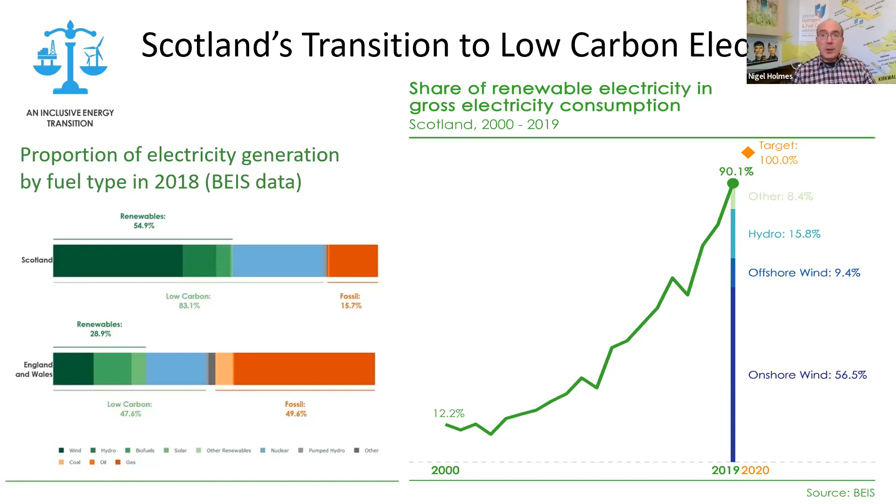But the challenge now is not electricity, it's actually to do with the decarbonisation of heat and transport. Electricity is about a quarter of Scotland's final energy demand. Transport is about the same amount, just over a quarter, and heat represents pretty much half of Scotland's energy demand. So if we're going to be successful in meeting the 75% reduction of greenhouse gas emissions by 2030, we will absolutely need to tackle the emissions from both transport and from heat.

And one of the big challenges here, of course, is that the current energy supply into both of those markets is essentially fossil fuels, liquid fossil fuels into transport, and natural gas is one of the main forms of energy used for heat. So how do we replace liquid fossil fuels and natural gas with low carbon equivalents?

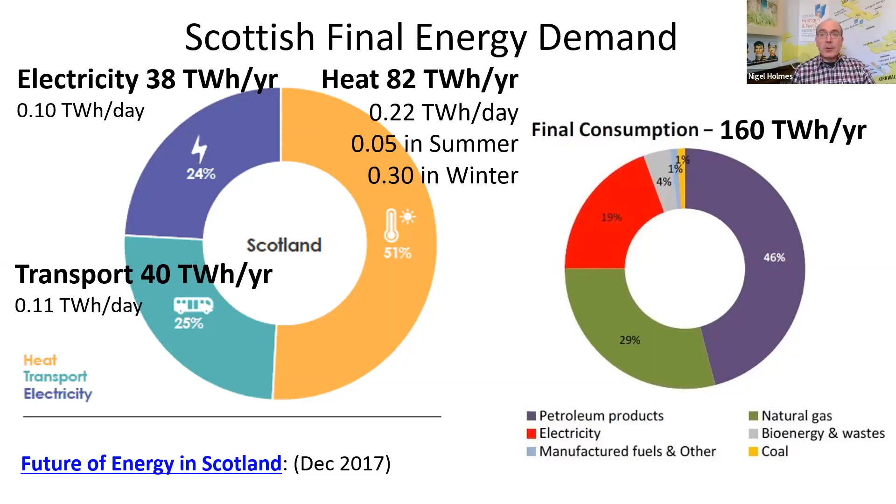As well as that challenge, when you just look at the annual pie charts, there is another factor which needs to be looked at very, very carefully, and that's around the seasonal variability of energy demand. The annual pie charts kind of just smooth things out. So you look at it, half of Scotland's energy demand comes from heat, but what that misses is that the scale of energy demand for heat varies throughout the year. Not surprisingly, we need more heating in winter than we do in summer.

Even this doesn't show the full detail of when you get very cold days, the amount of instant heat demand that happens typically at 6:30 on a very cold morning when everybody's central heating switches on. So there are real challenges in terms of how you meet the instantaneous demands and not just the annual averages. A lot of this will need to be considered by using energy storage, and this is well beyond what most battery systems would be capable of, even if they were commercially viable.

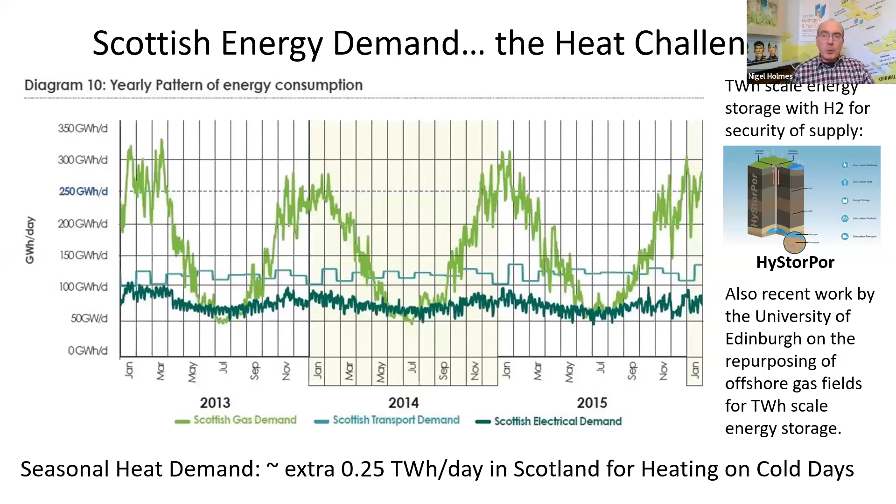So the examples I'm going to give are, we're going to be starting in Methil, in Fife, just north of Edinburgh, moving up to Aberdeen, and then heading on up to the very north of Scotland to Orkney before we come back down to Cromarty.

Just to mention, that dock was actually one of many docks in Methil that was used for exporting coal. So Methil was actually one of the biggest exporters of coal in the UK, and it's ironic that now it's one of the areas where a lot of the work on developing hydrogen systems has actually been carried out.

The Hydrogen Office, over the past 10 years, has provided a lot of education and outreach to schools and colleges in Fife. About 30,000 pupils and students have been through workshop activities led by the Hydrogen Office, and that's really important because it set the foundation for a good understanding, a good appreciation of hydrogen fuel cell technologies in the local area. But the Hydrogen Office has also been the base for various innovation projects.

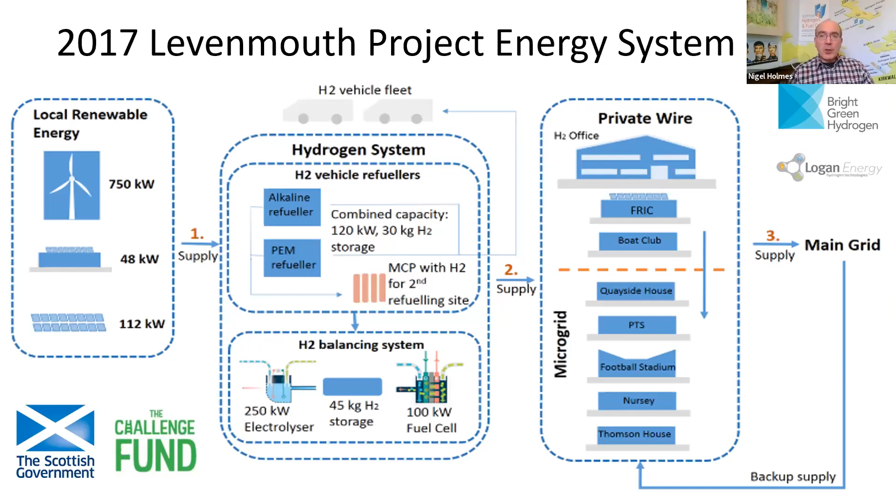And that was actually starting to predict not just how much you had in the storage, but what was the weather likely to be like over the next few days. So you could start to anticipate the energy demand and the energy supply. This was supported by the Scottish Government's Local Energy Challenge Fund.

So it's not the perfect solution - you still have some diesel, but it's actually a big step along the way. There are now developments with the same type of engines, but with a much higher level of hydrogen. So combustion and fuel cells will be 2 of the options that can be used going forward for vehicles, and also for other types of power generation.

But the next stage in the activities in Methil, this is a really important project, and it's being led by SGN, the gas distribution network company for Scotland. This is a project to prove the practicality of converting households from running on natural gas for heating to running on 100% green hydrogen for heat.

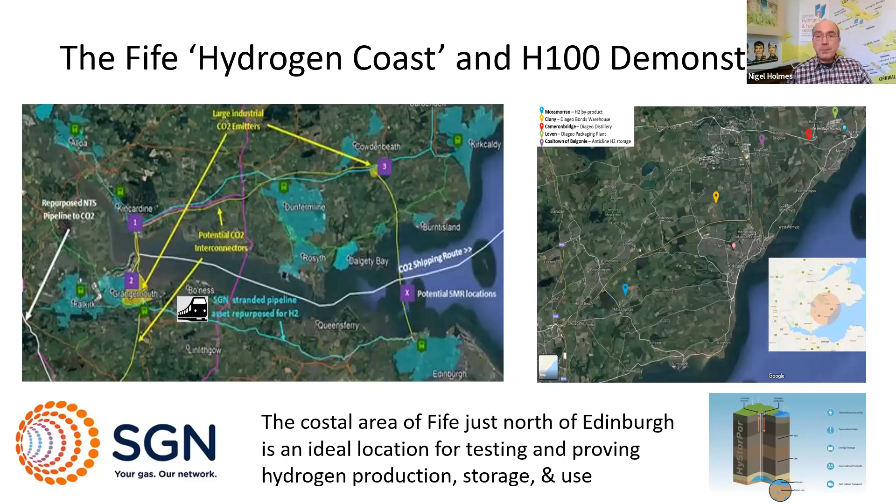Just up the coast from Fife at Bo'ness, another project is underway, nothing to do with heat - this is about transport. It's a project to convert electric trains into hydrogen fuel cell electric trains, with the plan for the train to be ready and running for COP26. So at Bo'ness, from the 1st to 12th of November, this train should be running using hydrogen.

We'll come back to the transport activities later on, but decarbonisation of heavy transport is one of the areas where hydrogen is seen as being particularly useful.

They've done over 1 million miles of travel, very reliable. One of the key successes has been the reliability of the hydrogen refueling, and that's helped Aberdeen develop plans for where it goes next in developing their hydrogen bus fleet.

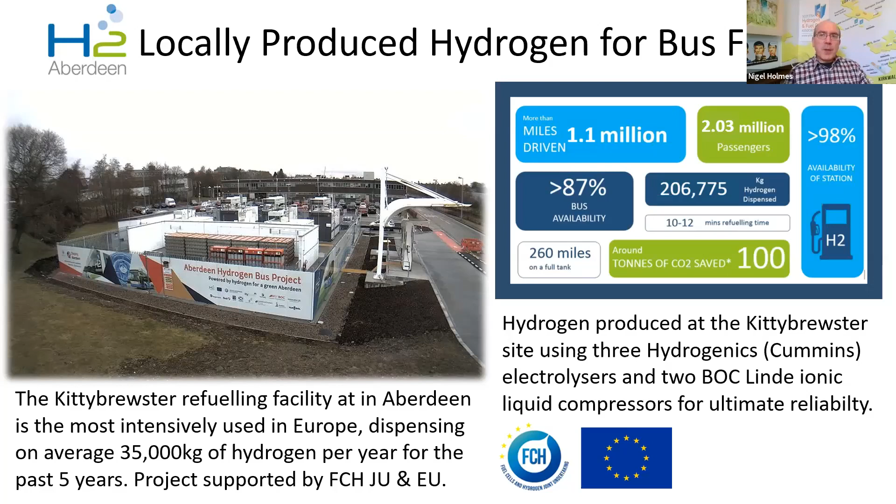But the design was very careful. There is built-in redundancy in most of the plants. There's actually 3 electrolyzers, 2 compressors, and I think just one refueling pump. But the work achieved its objective of reliability, and that set the foundation for where they're going next.

There are already 15 of the double-decker hydrogen fuel cell buses arrived in Aberdeen and starting to be deployed. And there's another 10 due to arrive. So there'll be 25 hydrogen fuel cell double-decker buses being used in Aberdeen by the middle of next year.

Now, the advantage of fuel cell technology is that, unlike combustion engines, there is absolutely no NOx or particulate matter from fuel cells. Fuel cells work in a very different way - it's a catalytic conversion of the energy in the fuel to make electricity rather than a high temperature combustion. In using fuel cells, you avoid the NOx formation and the particulates that you get from combustion.

But also in Aberdeen, there are a number of Toyota Mirai fuel cell cars. Some of these are used by the NHS, there's one used by SEPA, and some used by Grampian Police. But the one I'd like to point out is, if you've got a driving license, you can actually book this one up and take it out. It's a fantastic car to drive, a bit large for my liking, but very smooth, very comfortable, and a pleasure to drive.

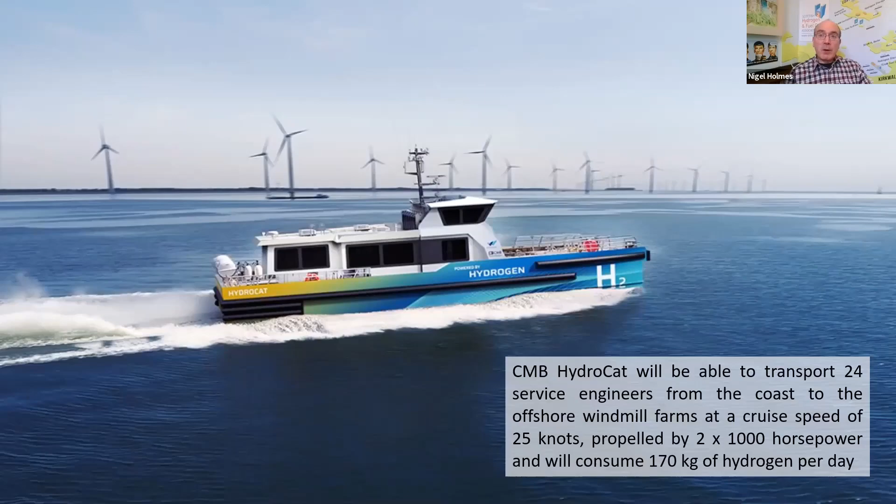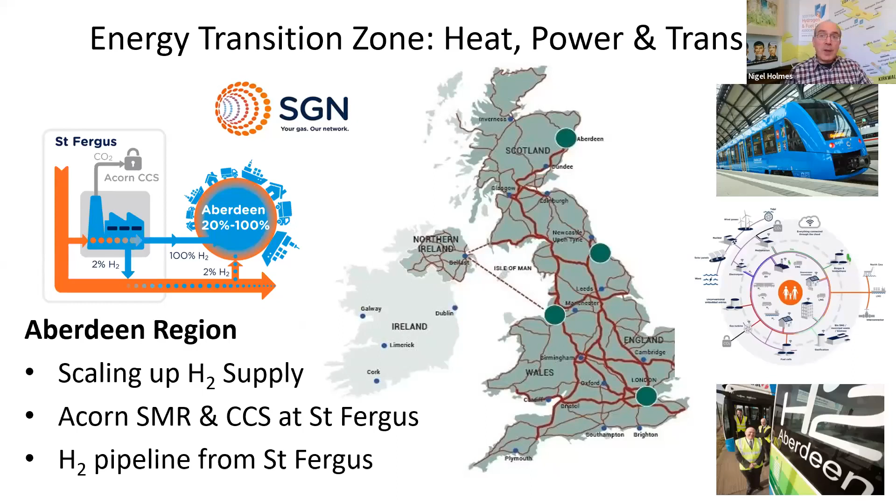And this is part of the wider activities in Aberdeen with the energy transition zone. So we're looking at decarbonisation of heat - can a pipeline be brought down from St Fergus to Aberdeen, bringing hydrogen from St Fergus? I'll mention the details in a minute. Potentially the use of transport - can hydrogen trains be part of the local transport infrastructure for Aberdeen? And indeed, can hydrogen trucks also start to play a large part in decarbonising logistics in the Aberdeen area? And we think that all of these are indeed possible.

But the question might be, where does all the hydrogen come from? And this is where there's often a discussion around, can we build up the green hydrogen, so the hydrogen produced from renewables, quickly enough?

Or do we need to use some of the hydrogen produced by conversion of natural gas, but using carbon capture and storage to make sure that hydrogen has a very low carbon footprint? One of the projects that is actually well developed is at St Fergus, led by a company called Pale Blue Dot. It's about installing a steam methane reformer that converts natural gas to hydrogen at St Fergus, and then capturing the CO2 and taking it out offshore to storage sites, typically depleted gas fields, where it can be stored safely in the porous rock structures deep underground.

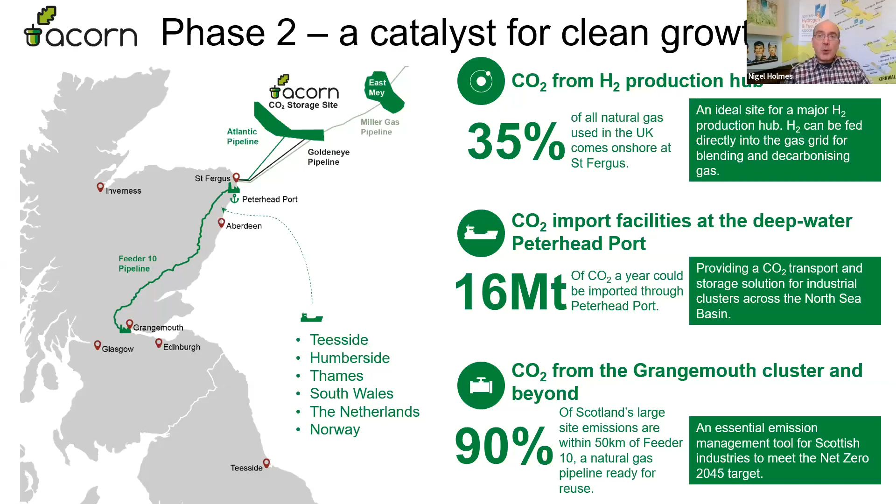So this is developing, this is an active project. If it goes ahead, it should be operational by the mid-2020s, and that would then become part of a much wider network of hydrogen production and hydrogen infrastructure.

Potentially the hydrogen infrastructure could start to bring together both the green and the blue hydrogen. In particular, some of the offshore oil and gas pipelines that exist, which are no longer needed, might be able to be repurposed for the use of hydrogen or for CO2 movement out to the sequestration sites. So there's a lot of work going on to try and understand, as part of the energy transition, what infrastructure could actually be usefully repurposed from oil and gas duty to low carbon renewables and carbon capture and storage duties.

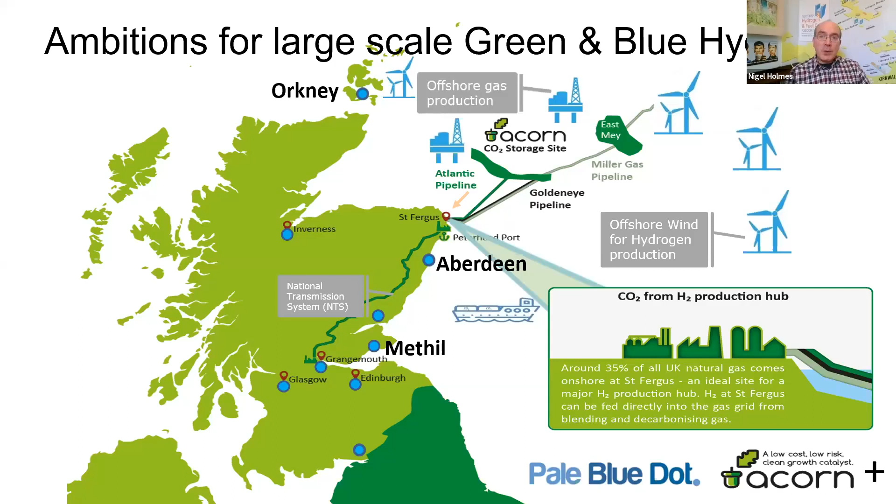And it's not just a question of the infrastructure in Scotland. It's also a question of how some of this infrastructure might join into much wider markets. We'll come back to this later, but the opportunity for Scotland is to really increase the amount of production of hydrogen, but also to see if the hydrogen can actually be not just enough for the use of Scotland's heat and transport demands, but also start to export some of that hydrogen to other markets.

So in the same way as we've exported oil and gas for many years from the North Sea, can we start to overproduce the amount of green hydrogen from renewables and start to export green hydrogen into other markets? In particular, markets in Central Europe are really looking carefully at how they might be able to meet their industrial demands for low carbon hydrogen, and ideally green hydrogen. So there could be a very good fit here between the supply of green hydrogen from Scotland and the demand for green hydrogen in Central Europe.

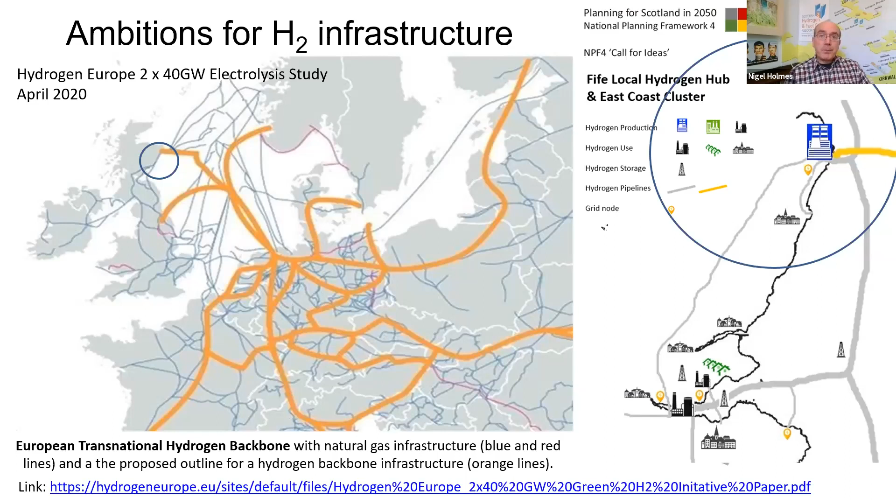So now going up to the north of Scotland and looking at things on a different scale, looking at things on a distributed generation level. Orkney has been fantastically successful in increasing the amount of renewables. Since 2014, they've been producing more renewable electricity than they've needed, so substantially ahead of the rest of Scotland in actually decarbonising their power network.

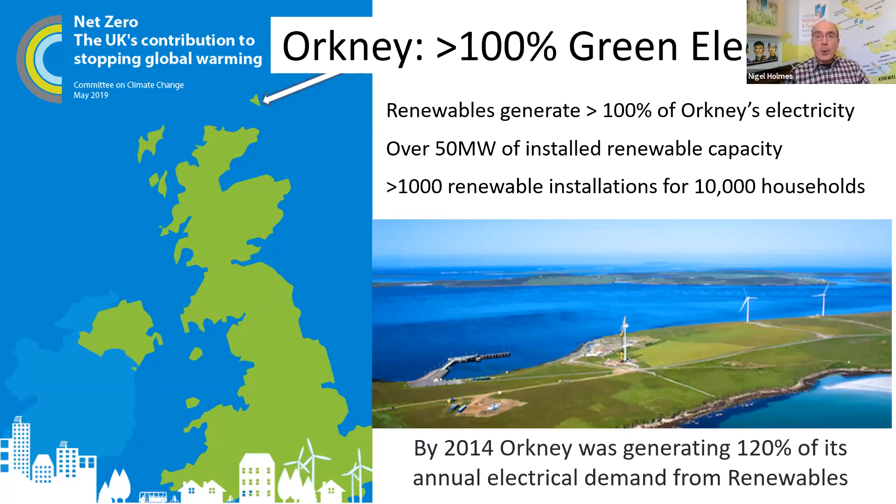And that's been a great achievement, but it's also brought some challenges, in that in many cases the wind turbines have found that the grid connections have not been either robust enough, or the demand for the electricity locally has not been enough to actually match the supply. And often you end up with wind turbines being turned off, and that's a waste of energy. People talk about efficiency, but we also need to think about efficiency in terms of how we can use all of the available resources, as well as how we move those resources from the point of production to the point of use.

But the way to overcome the challenge in Orkney was starting to look at the use of electrolyzers located close to the site of production. The first one was installed on the island of Eday, you see this at the very north of the picture, and this was next to the European Marine Energy Centre's tidal turbine test facility. There's some very, very fast flowing currents out there. Orkney is kind of between the North Sea and the Atlantic, and every time there's a tide, you get a lot of flow going past. So a very useful place to be.

Turning the surplus electricity into hydrogen allows them to make more use of the electricity, but they then had to think about who's going to use the hydrogen. Eday is about 120 people, so there's a limit to the demand on Eday. The solution is to actually move the hydrogen by ferry, put the hydrogen in tube trailers, and you'll see one of those in a minute, and move it by ferry down to Kirkwall, where it could be used for heat, for transport, for power. So very much finding ways of actually moving the energy from where you make it to where you need it, and using a tube trailer gives you the storage as well, which gives you the flexibility in terms of timing.

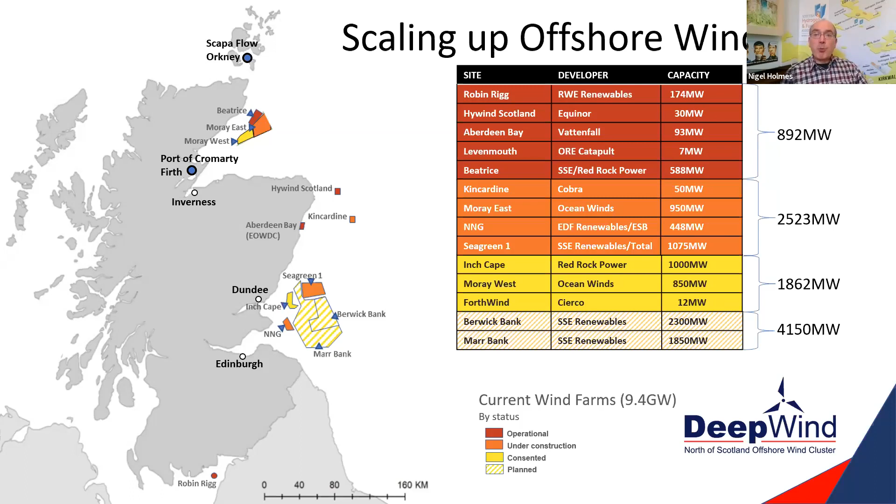Moving down the coast to Cromarty, just to wrap up, scaling up the production of green hydrogen, scaling up the demand - this is the next stage to go, and it's very much based on offshore wind. Just off Cromarty there are several wind farm sites, some already built, some currently being built, so it's in a very good location to bring the electricity back to the beach at Cromarty and convert some of that into hydrogen.

And this is absolutely the plan - having the electrolyzers based on shore, bringing the electricity into Cromarty, but then also looking to build up the local demand. It could be a mixture of transport, but also industry demand. The local distilleries in particular are very interested in how they might be able to use green hydrogen for decarbonising their manufacturing process.

Also linking into transport, so potentially could start to supply into Inverness, the buses. Trains could also be a possibility. So very much ports and harbours could become some of the hubs for green hydrogen activity going forward.

And the opportunity is that if we can really scale up the production of green hydrogen from offshore, if we can bring the cost down through access to low-cost, reliable offshore wind, then the opportunity is to export that green hydrogen into either UK markets or international markets. I mentioned earlier Central Europe as a potential. This is absolutely at the heart of the Scottish Government's hydrogen policy statement, which came out in December last year, along with the target that by 2030, Scotland would be producing 5 gigawatts of low carbon hydrogen per year.

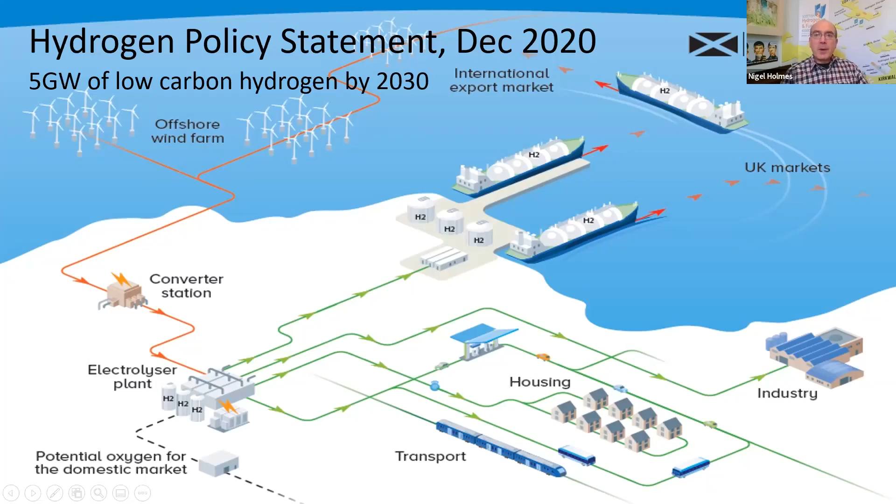So very much an ambitious target, very much a question of scaling up, very much a question of how do we learn from the early projects to make sure that when we do this, it's going to be reliable, safe, and commercially attractive. And going forward, cities will obviously be a key demand for clean hydrogen.

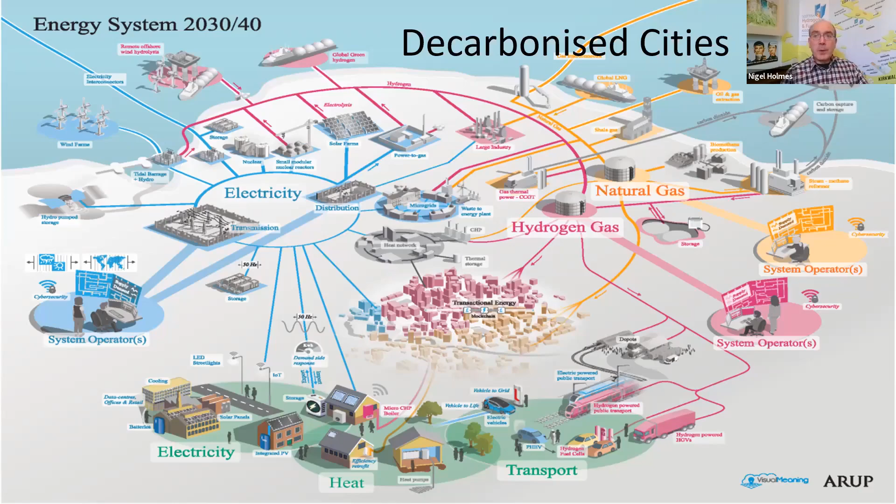Some of the ideas are already coming forward with companies like Arup developing concepts for low carbon cities. Glasgow is very much starting to look at this in more detail, with Scottish Power starting to develop a hydrogen production project at Whitelee wind farm just south of Glasgow. Glasgow Council is starting to set targets for becoming net zero by 2030, which absolutely sets the opportunity to move forward quickly.

So just to wrap up, COP26 is coming up, and some of the activities we're looking at is about how do we start to make the most of COP26, either in Glasgow or at other events. So we're looking at some of the opportunities to run events and activities during the first two weeks in November.

Hopefully, what the presentation has given you is a good insight into the projects happening in Scotland, what's been developed, where we are going, and the scale we need to reach if we're going to be successful in reaching not just net zero by 2045, but also some of the stage points along the way, 75% reduction by 2030. So next year, COP26 in Glasgow - hopefully that will be an opportunity, Alf, for you and your students to take an active part. And I'm very happy now to take any questions.